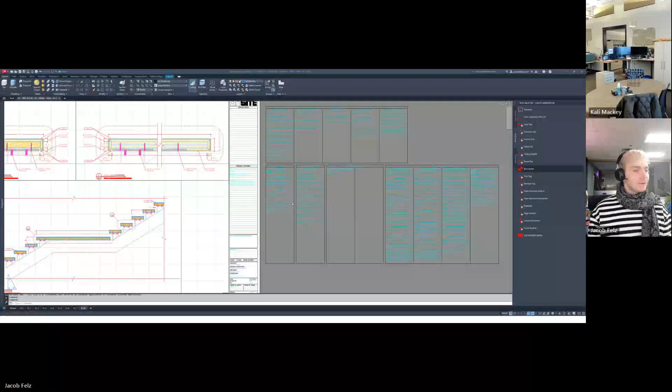No, I'm gonna just do two espressos. Reading Keaton's email. Sounds very lively over there this morning. Lively? Yeah, we got Trey over here talking up a storm. Per usual. That's just Trey. I could hear a bunch of voices. Wasn't sure what was going on, if y'all were having a party or something.

Let me check to see if my audio settings are going through. Okay, I'm gonna try to restart Teams. It's going through my webcam versus my actual headset, and when that happens usually you get a ton of background noise. I'm gonna try to restart Teams and my headset and see if I can fix that. Sorry about that, I'll be right back. All right. Jacob's got to restart Teams because it wasn't going through his headset. Got back just in time then. Mm-hmm.

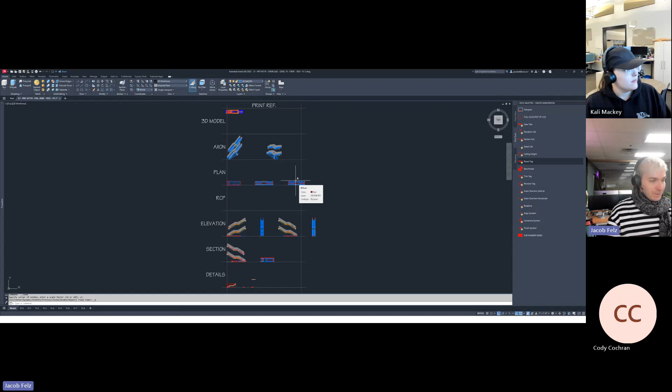So we did a little bit of this last time we were on this call. Last time we plotted all of our views, put them all in model space, and laid them out. Last night I was helping Greg get this wrapped up because he had to release it before the end of the week, so I tried to knock it out for him. Now we can review what I had done, and I've got a couple things I want to change that I thought about on my way home yesterday. So we'll look at what I completed since the last time we spoke.

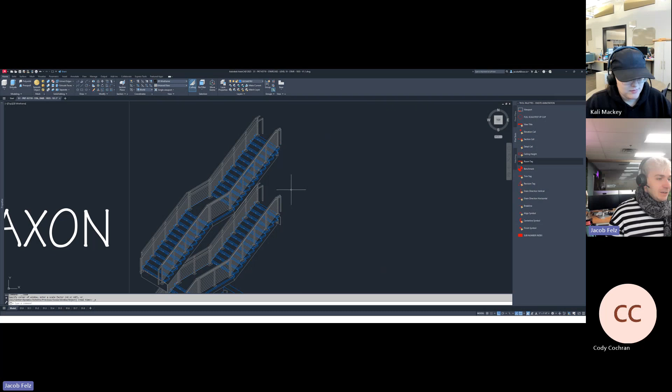Last time we took our flat shots, section planes, and section views off of our model and put them all in model space. We switched over to 2D wireframe, so we're dealing with 2D lines now. The model is still up here in the top corner, but that's okay. Since then I cleaned these up a little. I didn't change any geometry, but I put anything that was not by onsite on the existing layer, so you can see it in gray. That's a little extra finesse, not really required, but I like doing that.

I missed these lines here, so that's another correction real quick. I like to put anything we're not doing on the existing layers so it grays it out and makes it more clear what our intention is to provide. So I went ahead and did that yesterday. I actually see there's something else here too.

Right here. Looks like I may have forgotten to, I might have hid that plate by accident when we took our flat shot. There's like a steel plate that's supposed to live right here too. So I'm gonna put that back. I'm just copying it from the one below because it's the exact same plate, just copied up above.

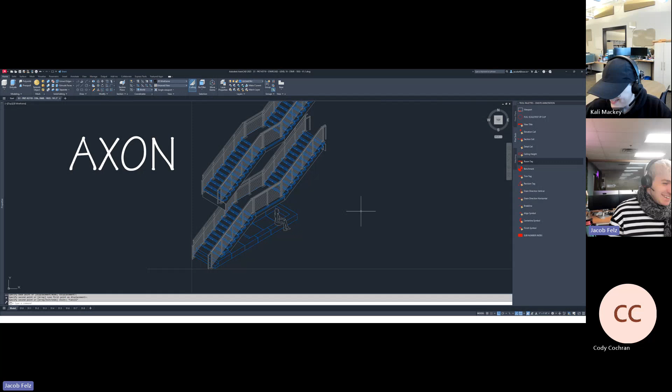So anyway, yeah, I grayed out anything that wasn't part of our scope, including Jean, newly named sitting lady. Carefully went through and made sure everything that was by us was on the geometry layer, so it's all in blue right there. There's a little bit of weird stuff here because this is the stringer going down, but then this blue here is where that stringer cuts through the platform below.

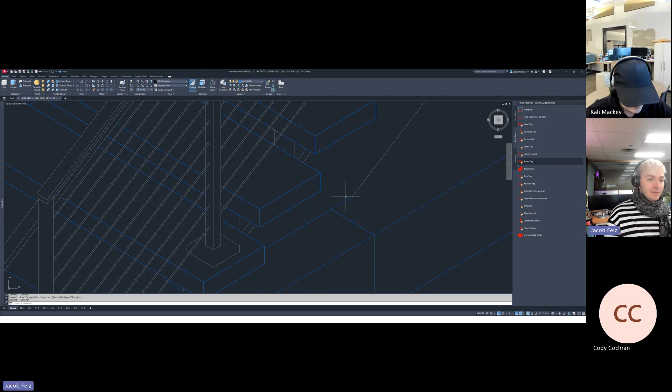And so I left those lines as blue because technically that's part of the top of our platform, even though the stringer is here. So I kind of did a combination of the two there just to kind of show like, hey, that's the stringer, that's the platform. See, this here, I also left it as blue too, for the same reason, it's kind of where that stringer intersects the platform. And so I was like, well, that's kind of the top of the platform where we're cutting out for that stringer. So I left it blue as well.

Pretty much the same notes over here too. I just kind of went through, grayed everything out that wasn't us, kept everything in blue or the geometry layer that was us. Except that. See, now I'm like scouring these for mistakes because I did this a little bit near the end of the day yesterday. So, no, that's part of the plate. Okay, I think we're good. Anyways, yeah, I just did that.

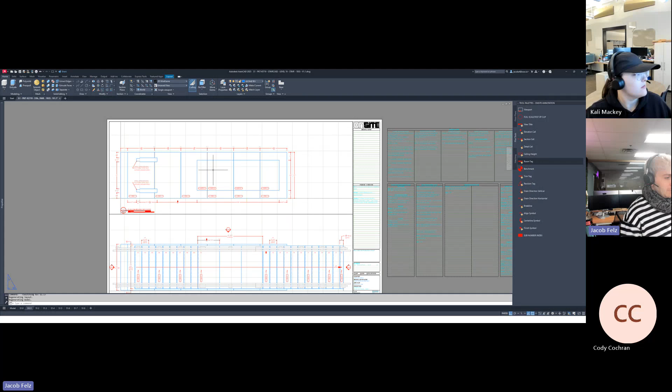Then I came down to my plan view. And in the plan view, I kind of went through, I'll go back to my paper space so you can see what I have here. I created 3 separate plan views for this drawing intentionally. One of them is just the planter itself without the staircase on it. That was just so we could show the planter and platform in detail here.

Actually, I'm going to put a little note on here since we're looking at this now, like a drafter's note, and it's going to read something like "staircase and stringers removed for clarity." That way we could actually see the extents of that platform. I'm going to underline that part too, and then get rid of that little leader.

But I'm just going to put that note here near the bottom of my view, somewhere close to where my view title is, just to give them a heads up. Hey, there would be stairs here, but I removed them intentionally so you could see the planter. So I'm adding that note here for that.

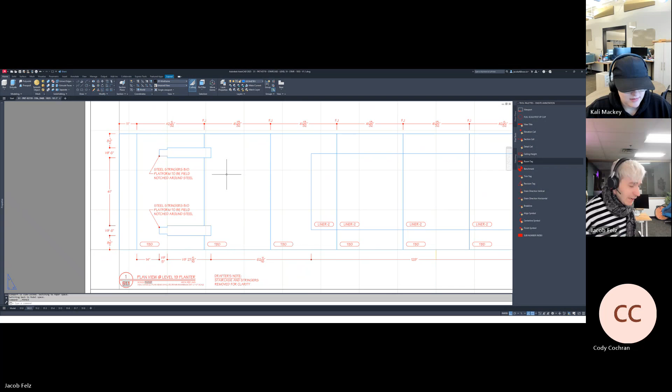I put a couple of notes on here too for these cutouts that are going around those stringers, because usually what we'll do is we'll do them in the field, because if we were to try to cut those in the shop, there's a very good chance it's not going to actually line up with what's going on in the field. Unless we get like a laser scan of this room or something, which I know we're probably not going to get.

So I just put a note on here saying steel stringers by others and platform to be field notched around the steel, just so that way our installers can see that and they can be like, okay, I know that I need to go out there with like a jigsaw and cut this out.

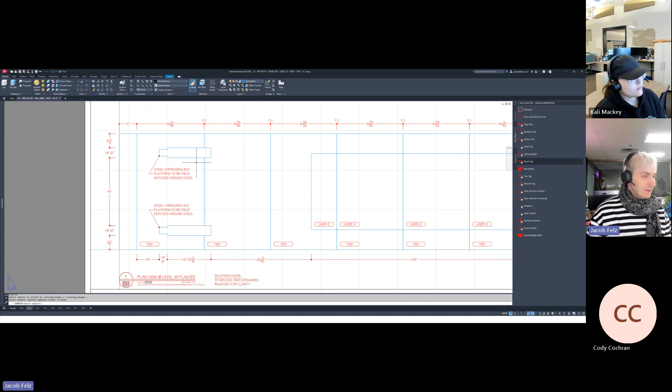I also did want to make sure that I take note of this too, is that where this cutout is, in order for that to slip over that stringer, we do need a field joint somewhere in that cutout, just so you can kind of push it together like a puzzle piece around the stringer. Because if we just put the cutout here in the middle, oops, it won't let me do it. All right, that's okay.

So if we put the cutout there, say, and the field joint was back here, there'd be no way for them to actually get that platform around that stringer without some kind of a field joint intersecting where the cutout is.

So it was kind of unintentional, but it happened in our favor here that the cutout does intersect a field joint. So I just wanted to bring that up, because if you don't have that, it would be really hard for them to figure out a way to get those two platforms to merge around the steel stringer that's already out there.

Let's see. The planter itself, I talked to Greg about this yesterday, and it is all undetermined as far as what the finish of the planter is going to be at this point. So yesterday we talked about that a little bit, and we made the planters. We try to make the field joints no more than 48 inches wide by 8 feet the other way, just in case it is some kind of material that is only restricted to a 4x8 sheet.

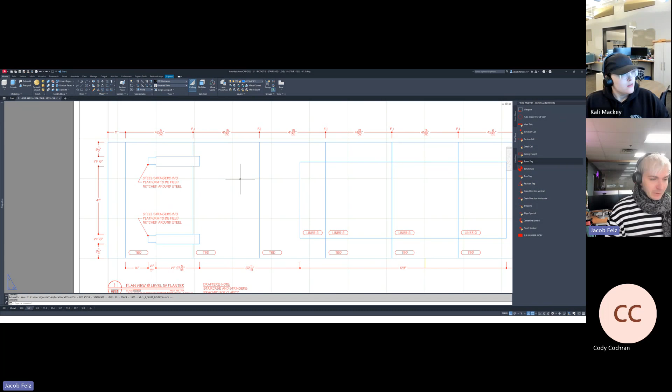So we did that a little prematurely, to make sure that if there is a smaller material they select for this, we're able to make it work. So those field joints are put there intentionally in that way. I also labeled all of the top of the planter as TBD with a material bubble too. I did that intentionally, and I put one on the stair step at the front of that planter too, because at this time we don't know what that's going to be.

But depending on how bloody the red lines are, Greg may or may not ask for our help with this. So I'm setting him up to be more successful later by putting these bubbles on here, even though they just say TBD. Maybe they don't mark it up that much, but they tell us what the material is, he can just go in there and paste that in Bluebeam right over top of where it says TBD and say PL1 for this. He's already got a material bubble placed there, so he just has to do some copy and paste work if that's the case.

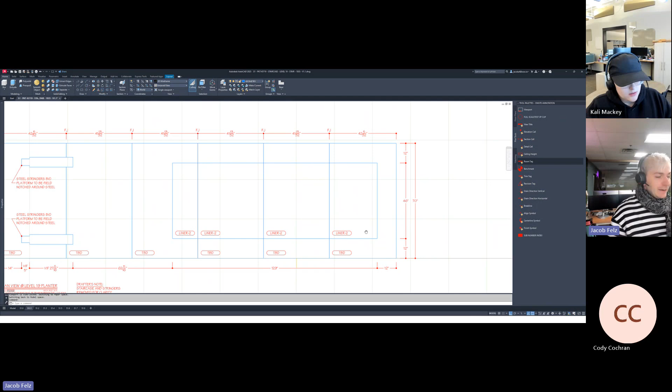I didn't put any grain directions on here because, again, not really sure what that's going to be. It may or may not be grain, so I just left that part alone for right now. We may find out what it is later, but for right now, no clue. And then inside of the planter, I labeled this with something called liner 2. Now, if you are in the material log, you're going to see at the very top on that standard job list, and it should also be in our template too, there are 2 types of liners up there.

So when you're dealing with a planter, you'll probably be using either liner 1 or liner 2. Liner 1 we tend to try to not use as much anymore. It is literally what it sounds like. It is a 5-gallon bucket of Flex Seal that they just paint on the inside of the planter, and it keeps some of the moisture out, but it's not as good as putting an actual liner in there. So we try not to use that as much anymore.

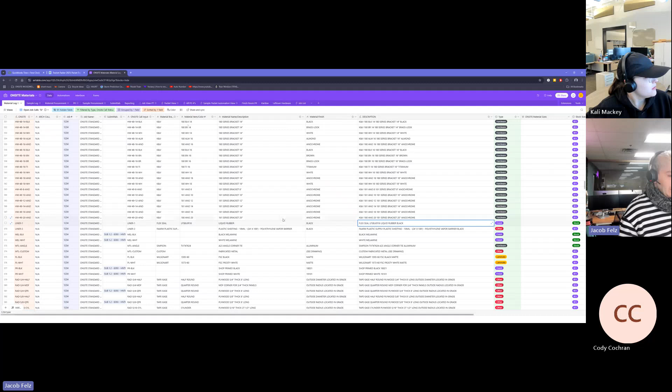For a while we were doing that because it was super simple and easy to do, and you didn't have to worry about coordinating with other trades, because our shop could just roll that on with the paint roller. But again, it's not as durable as some of the other things you can do. So the other thing we have, liner 2, which is what I put on here, is kind of our newest standard. It looks kind of like a roll of garbage bags, but it's really just a roll of black plastic. They put that in there, staple it to the inside of the planter, and it'll keep any type of water from getting into the wood or the framing below.

So that is what liner 2 is, and I went with that because I'd rather go the extra mile and make sure it's right, rather than use our old standard. If we wanted to switch back to that, I'm fine with it too. But liner 2 is definitely the better route to go for something like this. So yeah, I used that for the inside of the planter.

And then my dimensions around this guy here, I was being a little careful in selecting where I wanted to put those dimensions, because at first I was thinking about how do I really go about this. I guess what I could do too is, I didn't put an overall dimension up here, but I can definitely do that too.

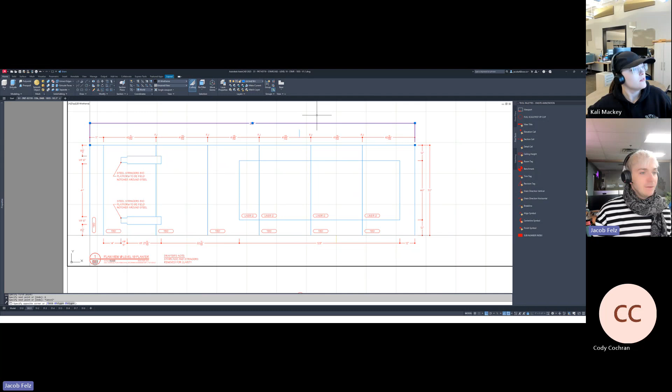Right about there. Uh-huh. Get over there. Come on, dude. What are you doing with your life?

All right. So I just put in an overall width for the entire planter. I already had my overall depth on this side over here. And then I kind of just broke it down in terms of my top line of dimensions. I went from the step at the front to my field joints, and I just kind of went down the line, labeling out where all my field joints were. And then I added this little text box up top that just says FJ, meaning that that is just a field joint.

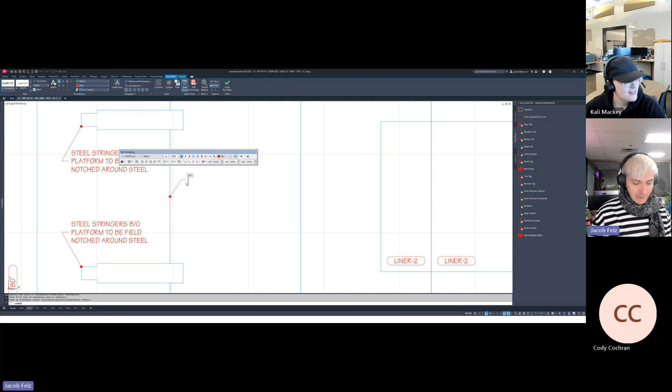We used to label them a little differently. Anytime there was a field joint, we would literally make a leader and point to it and say FJ for field joint on there. But that does produce more clutter on the drawing too. It's a lot easier to label it and not have as many lines and dots and things if you can just stack it right on top of the corner of your dimension string there. So we've been doing that a lot more recently. So I have those labeled up top.

Moving down this side over here, I have my overall, but then I was like, well, I need to label my planter too, so they know how to build that thing. So I went 12 inches in, 46 wide, 12 inches across the other side there. And then I continued that sort of method of dimensioning down here so I could show the other side of the planter drop down. So I went 12 outside to outside of planter, and then I just kind of took this and, oh, sorry, that was confusing. I was trying to figure out what the heck I did here.

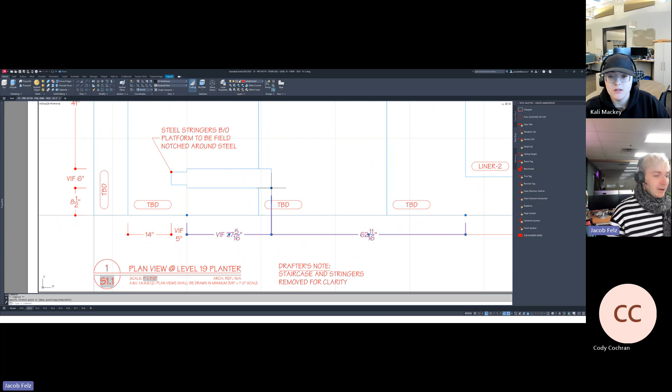That's supposed to be dimensioning this, but I brought this dimension back to here to be a little bit easier on the eyes, because then I don't have to have lines overlapping other parts of the drawing. Because there's already a lot going on here, so I kind of just brought those dimensions back to the edge of my drawing.

And then I went ahead and I just labeled the footprint of where that steel stringer is approximately. Definitely put VIFs on that, because we really need to make sure that that's right before we go about actually cutting anything there. So although these are exactly what you would expect to see based on that model they sent us, I just want to make sure that these are actually right before we stick somebody on it with a saw and they cut it wrong or something. So we're VIFing those.

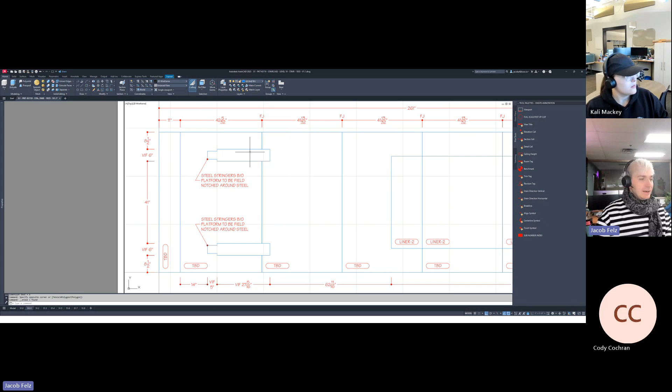And then the last side of our platform, what I have dimensioned is from corner of platform to top of my cutout, and then all the way through, just dimensioning the width of the cutouts. I am also probably going to put in a quick dimension here. Oh, I already did that. Never mind. I was thinking that I didn't have that labeled, but it looks like I must have that there. So we're okay. All right.

Planter, that's about it. Moving up to the next part of the plan view, this would be your 19th through 20th floor staircase. We did talk about this last time, but we put a label on each tread and each landing. That way we can label how many steps the shop is going to have to produce to do this. It's a lot easier for them to look at this and say, okay, I need 9 here for this, and then I need, well, I don't know if I should have restarted the numbering there, but anyway, they can pretty much look at this and be like, okay, I know I need like 20 treads for this drawing, so that's what I'm going to make.

And the landing, I have it labeled with a number 2. Really, that's just for my benefit to make sure that I didn't skip anything. But within the landing as well, I'd added some field joints in there too. Originally, it was drawn just like this, where there were no field joints in that landing, which when you're dealing with solid, you definitely need to have field joints for expansion and contraction, and also for just being able to get the material that wide.

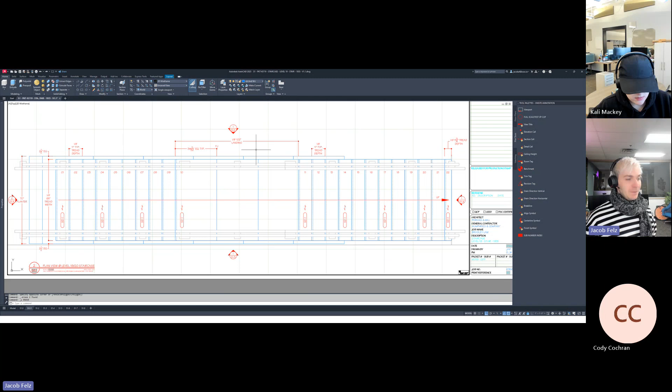So I just went with the standard approach where I tried not to exceed 48 inches wide for our panels or our solid here. At least to show them, hey, we're going to need field joints in this landing. It can't just be all one slab of solid, because where are you going to find a tree that's 102 inches wide?

Maybe the sequoias or something, I don't know, or the redwoods, but definitely not around here.

So I have field joints in there just so we can get that all situated. I also went ahead and put in some material calls last night. Greg came by and let me know that all the stairs are going to be SD1 for the project, which I think was a walnut color, solid walnut, flat cut. So that is what's going on there.

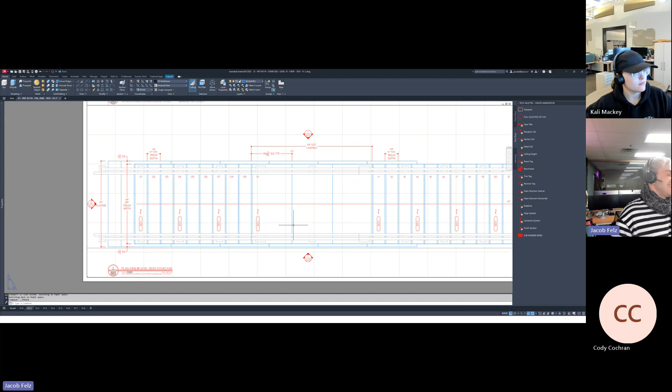I figured that was you. Anyways, so I went ahead and went every 3 treads and put an SD1 call. I could probably do even less than that and write TYP underneath of it, and that would be fine too, but I did that just so you could see this is continuing all the way up, all solid. My grain direction is all going from left to right when you're going up those stairs. It's all going long grain rather than short grain. If you went this way, it's probably not very standard to see that anyway. So anytime you're dealing with treads, usually it's going to go left to right. Let's see, there's some dimensions on there.

I think we talked about these a little bit last time too, but the treads, I went ahead and wrote 11-inch VIF TYP, and then labeled what I was calling out there. So it says tread depth on that. I also put one here, so people don't get confused or think that maybe the treads above the landing are different, because they all have to be the same. So I did put that there just to make sure it was clear that every tread from down below and up above is going to be 11 inches from front to back.

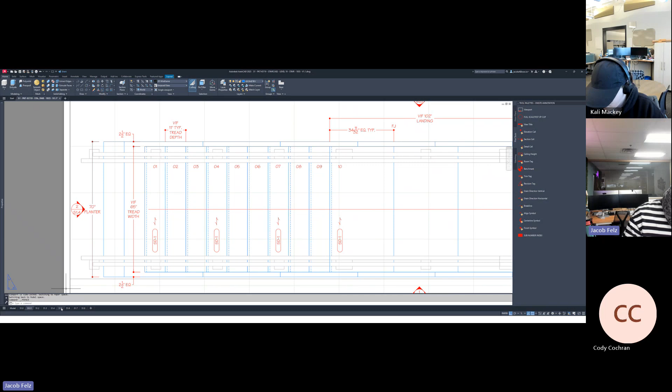The landing, I went ahead and put the overall dimension here, followed by a sub-dimension of just my EQ for where my field joints are going to go. And again, threw that little field joint callout up top so I could label that as what it is. On the treads, I added this in manually. It wasn't something that came in with the flatshot, but I went ahead and offset this line 1 inch this way, and that is to represent the fact that there is an overhang on these treads. So each tread is overhanging the tread below it by 1 inch. I showed that with a hidden line up top on our plan views here, so it's clear as day what's happening there, or at least hopefully clear as day.

I probably didn't need to label this here since it's up top over here, but I did it anyway just in case it's questioning what is this item that's down here below our stairs. So I labeled that from left to right, saying it's 70 inches, which is the same as what's up here. And then these are just showing that the stairs are equally spaced from left to right of the planter, where the planter sticks out past the treads.

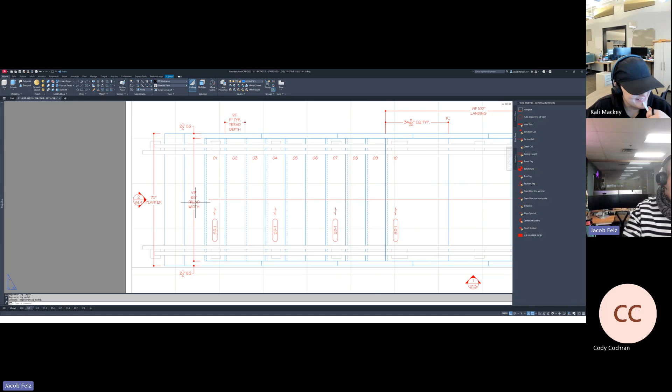I have one dimension here for my typical tread width thing, that each tread is going to be a total of 65 inches wide, but I did label that with a VIF because we are dealing with a different vendor's product, as we're dealing with the steel vendor. It does have to line up with the steel regardless anyway, but it should be 65 from one width to the next, to the next, to the next, all the way up. That shouldn't vary.

And the last thing over here is that little baby tread at the top. It might seem a little unusual, but that one is different. So I wanted to make sure that I gave them what I think the depth of that tread is going to be. That way, when the shop goes to make it, they don't have to make that full tread. They can just make that 5 3/4 tread there, and they shouldn't have any issues with that.

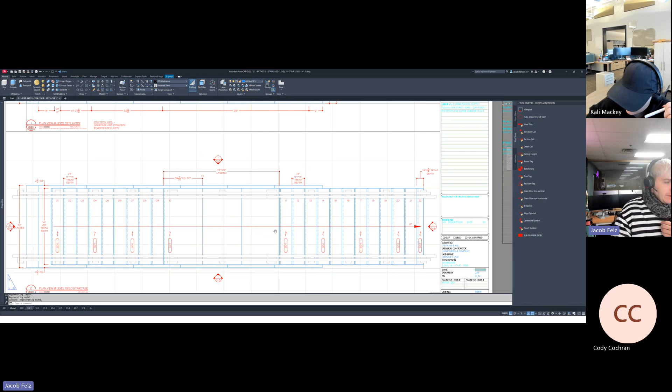And then of course you have your elevation calls just like you would normally have for any other drawing, so those are all placed on there. I'm probably going to add those to this view up top here too, because I did not do that.

Again, this was kind of, Cody saw me yesterday. I was a little frazzled. It was near the end of the day and people kept coming up to my desk, like, can you help me with this? And I'm like, dudes, it is like 4:30. I'll do my best to help you, but you're pulling me in 3 separate directions right now.

So anyways, yeah, I'm going to put these elevation calls up there too, so that way they're on both views, because we were using them for both this drawing and the one below. See, I need this one too. Get on over here. Oh yeah, and then that little arrow dude too.

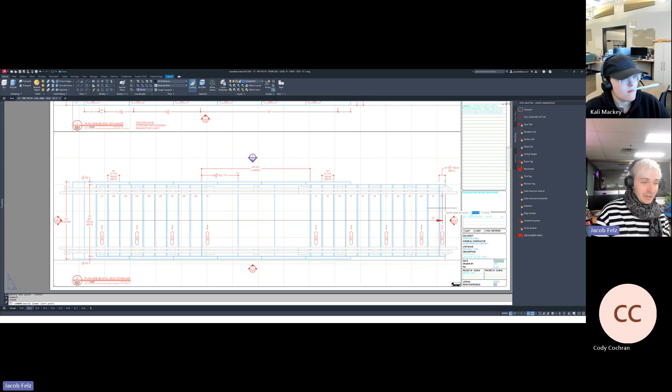So how I made that arrow, in case you guys are following along later and you want to recreate that: all I did was I used the leader command. You want to start with the side you want the arrow to be on. So if I wanted the arrow to be up here, I would just click my mouse somewhere on that view, drag it straight across to wherever I want it to stop. And instead of putting text on there, you can hit none.

And then what you can do from there is change out the dot for an arrow. It's pretty easy. You just click on that leader, you go into your properties on the sidebar, and you can go to this section here called lines and arrows. Where it says dot, there are several different other variants of leader, like tails and heads. So what I did here is I went closed filled arrow.

And then I changed my arrow size here. Well, that's huge, but by changing this input here, it allows you to change the size of that arrow. It looks like I probably just went with a 1/2 inch wide arrow. That's all I did to make that. And I just dropped a little text box on there saying up, meaning that that is the up side of the stairs. Let me delete that. All right.

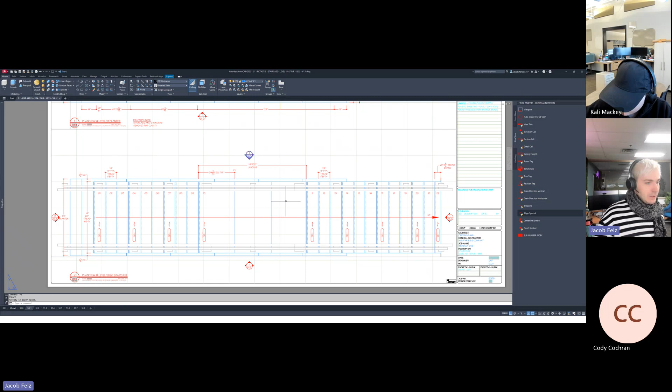So that's really about it for that plan view. And then if we look at the next one, it's going to be very, very similar anyway.

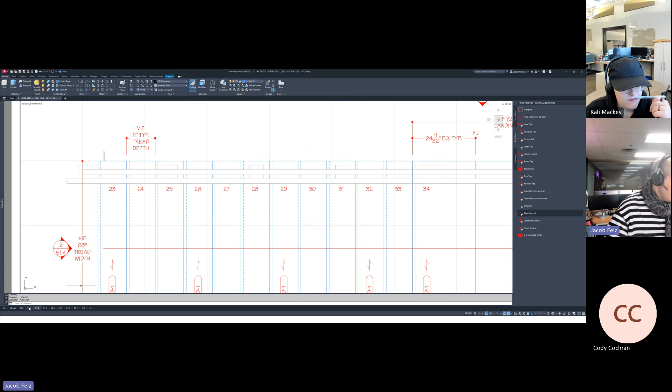Doesn't really matter too much, but I think yesterday I just decided I was going to go that route and just continue the numbering from the 19th through 20th floor staircase through the 20th through 21st floor staircase. All right, cool.

We can get into our elevation views next. So I will say a lot of times when you're dealing with stairs, you're probably not going to need elevation views for a lot of what you're doing here. I chose to include those on this drawing specifically because each of these treads has a finished end cap on the left and the right.

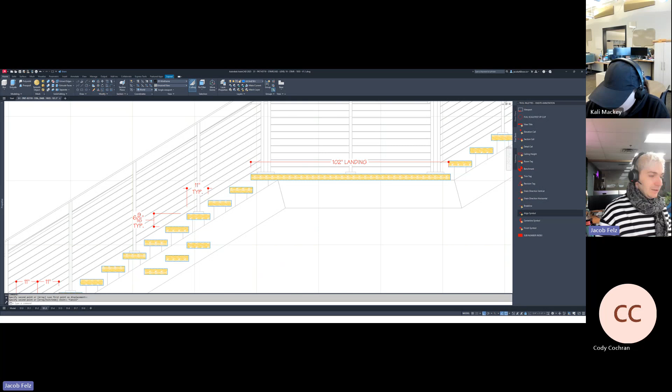Normally, what we're used to seeing is, I'll show you an example here. There's a copy of a few of these. Usually the treads live like in here, in between the stringers, just like that. That's pretty standard. This particular staircase was a little bit different, but I mean, it is custom millwork, so we do have to deal with kind of weird things here and there from time to time.

So because this was a little bit different and it had finished ends on the left and right of each tread, what I did was I went ahead and made those flat shots off our model so I could provide an elevation view of all four sides of the staircase, in case it does help anybody later on with visualizing how this thing comes together.

I also put hatching in here, which we don't usually do for elevation views, but I put this hatching in here to show the grain going from side to side on the side of the steps. You could also just put a grain direction arrow on there too, and that would be just as fine. But I wanted to try to make this look a little spicier than what it was looking like, so I cleaned it up a little bit and added that in to make it look nicer.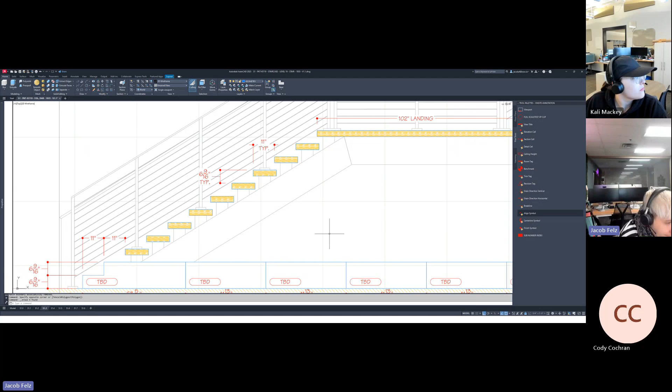You can notice down below, all these planter panels are labeled as TBD. I didn't put field joints in here, so I could do that too.

Let me do that real quick. I'm just going to drop in a text box here for that, delete the leader, and then in my properties, a lot of times what I do with these is set the justify from middle left to middle center. That way the grip point on the text will be centered on it instead of off to the left or right, so you can use it to center your text right over top of your dimensions like that. So I'm going to add those in.

I'm going to have to do that on the other side too, I'm sure. All right, so just like that. I don't have the field joints in this landing either or this one, so I'm going to add those in too.

To do that, it might be better to use my model space. What I can do is copy these lines off of my lower landing, using the copy command with the base point of the front of that landing. If I go back to my elevation view, I'll find the larger one, there it is. I'll just paste it right there using the edge of my landing, just like that. That should make sure my field joints are in the same place as in my top-down view, because these were something I added in after we had made the model. They didn't appear in our flat shot.

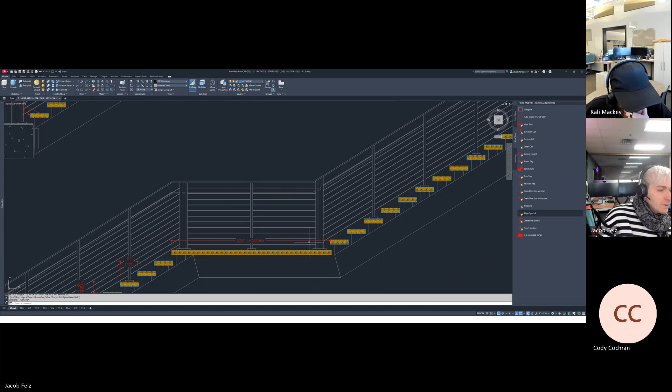So I'm going to do the same thing here and then work my way to the other elevation, just mirror those over. Copy, using the front of my tread or my landing. And I'm going to go back down to here and paste it at the front of that landing there, and then trim these lines back so that they're touching the edges of that landing, just like so. Okay, now.

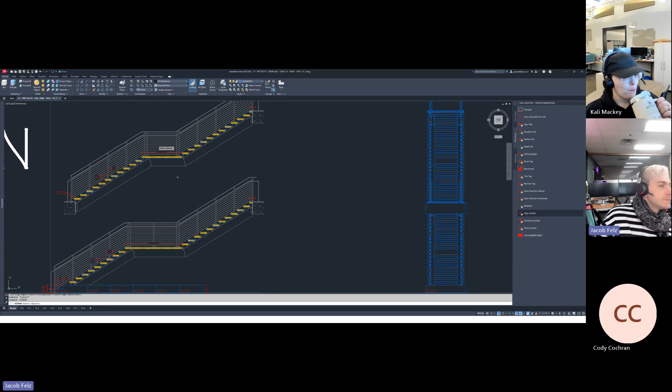From there, I want to actually copy those into this section view here. I also want to copy those over to this elevation over here too, so let's do the mirror trick to get these over to the other elevation.

I'm going to highlight these field joints, and before I set my mirror line, I'm going to hold down Shift and right click and go mid between 2 points. I'm going to use this sort of magic trick to get this to work just right, so I'll go mid between 2 points.

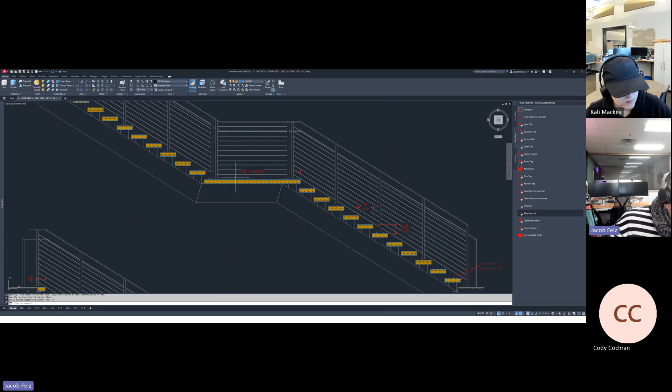If I select the front edge of my bottom landing, and then the front edge of the landing on this side, because my views are all lined up, that magically makes it so now if I hit mirror and don't erase the source object, this is going to allow me to line these field joints up just like they are on this view, but flipped the other way.

Now, I guess I probably didn't need to do that anyway because they're all equally spaced. So in hindsight, maybe that was kind of dumb. I could have just copied them, but I didn't think about that until just now.

All right, I'm copying these. I'm going to paste them down to the landings on the section view here.

All right, and then I'm just going to clean these up a tiny bit. Those field joints, I'm going to show them just going through that top layer of plywood and solid, just like that. Do the same thing up here, because you don't want it to cut through the bottom panel here. That would just be silly to have this little 1-inch panel at the edge, so we're not going to worry about that.

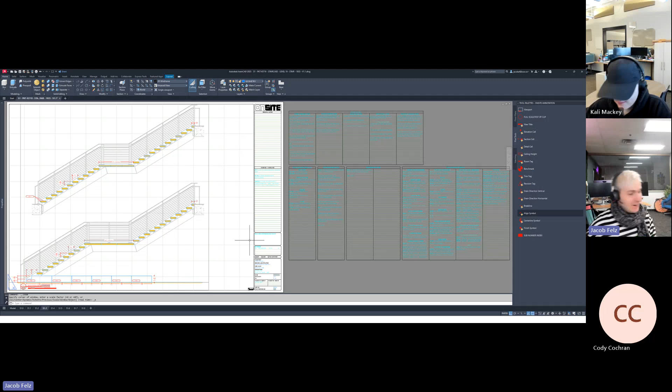Okay, cool. Let me go back to what we were doing. It's kind of funny because I'm like checking my work as we're going through this. All right. The drawing turned out beautiful, but beautiful isn't everything. Sometimes you got to have accuracy in there too. So, all right. So we got those joints in there, no big deal.

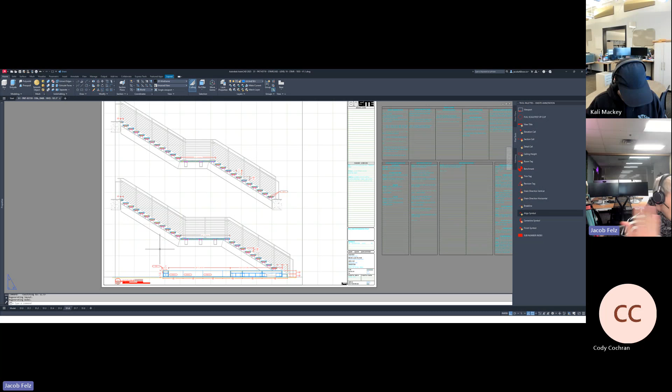I want to add in a couple of section calls here too on these elevation views, which was one of the things I thought about last night on my commute home, was that I did not put in a section view for this view here, and I didn't put one in for this view here, which this one is a horizontal cut through of the planter. And this one here is just a vertical section through the entirety of the staircase from left to right.

So if I go back to our elevation views right here, what I'm going to do is I'm going to take the section call block. I'm going to drop one in here. I'm going to rotate this around if it lets me do it. Oh, I don't rotate it again. I kind of want this to be on this side because there's more room over here. If I put that bubble over here, that thing's going to be cut off.

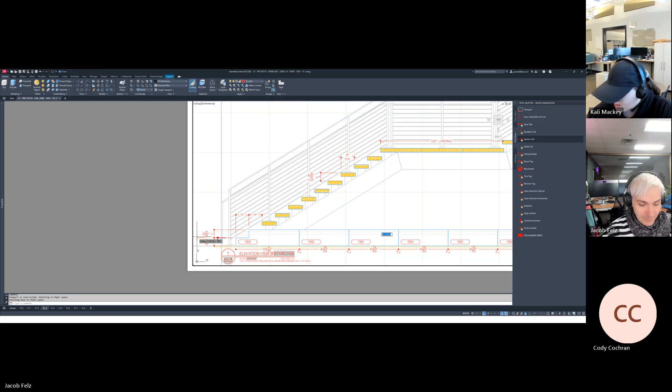I wish I had a funny pun for that. I can't think of one right now. Anyways, we'll put this over here. Ah, jackwagon. Making commentary about AutoCAD behind its back in front of its face.

All right, I got to change this label here from S1.3 and it's going to read S1.7 because that is the page that has this section view here. So going back to that elevation view one more time, I put that in there. I have an elevation of the front and the back of the staircase, which we kind of looked at the other day a little bit. This is where I'm going to call out that vertical section through the stairs.

I might actually add that hatching in for the treads here too to be consistent, because right now it looks pretty plain Jane. And I don't think I even really put any dimensions on here, so we can also do that too. I have material calls, but I don't really have any dimensions on it. So we'll add that stuff in too. Before we even do that though, let's add that section call in. Well, I guess we got 2 section calls to add. We got our horizontal one at the base, and we have our vertical one through the middle of the stairs.

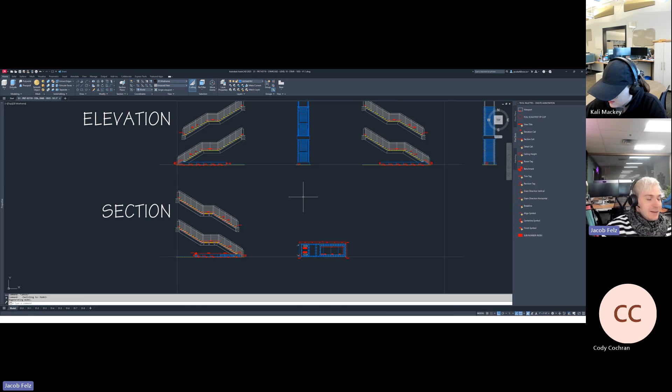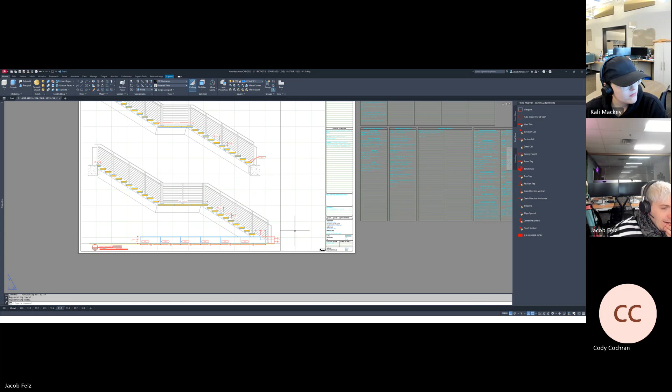Ooh. All right, sometimes I like to do this in paper space, and other times I think it helps to do this type of stuff in your model space. In this case, I'm kind of going back to model because all my views are on separate drawing pages. So it allows me to use the copy command here and move it from this view to this view. But let's see if I can make this fit. I have to go back to my paper space and just see if there's any issues with that. Yeah, look at that. I knew it. All right, I'm moving that over. All right, so I got that corrected.

Vertical sections. So let's go over to our front and back of our staircase. Let's see if we can add those in. It's going to be kind of tight. There's really not a lot of room to work with here. So I might have to break some rules of my own. Usually what I'll tell you guys is you want to make sure that the flag and the arrow are outside of your view. But in order for me to do that, it would have to be like up here in the gray, and that's not realistic.

So what I'm going to do is get it as close to the top as I can without it crossing over that line. And then I'm going to take this line here, and it's going to have to overlap our view too, unfortunately. Makes me cringe at the thought of it, but it is what it is, because this is a very tall staircase. So let's see, and that is view 1 on S1.4. So we need to change that out. That's 1.4. Very important. I'm going to go through here and copy that over from this to this.

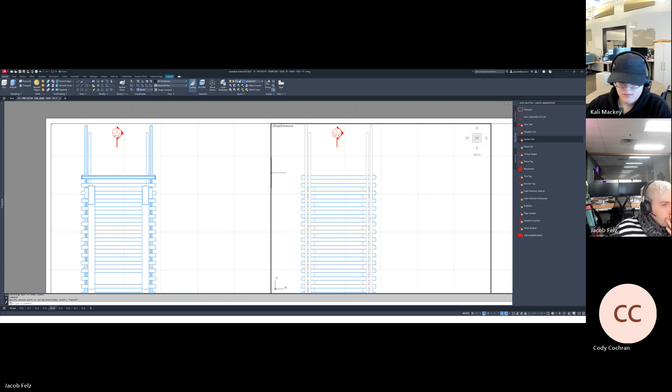All right. And technically, really that should be flipped anyway, because you're facing the other way when you're cutting through it. I'm going to come back and do the hatching on this after we're done with everything else. So I'm going to say a note to self, hatch page S1.4.

And keep going through here and see if there's anything else we can do. This is kind of hard to really dimension anything on this view because of all of the things happening here. There's a lot and not a lot of space to work. What I could do is I could potentially put in some height dimensions like right here, which would give this view at least a little bit of substance, because right now there's just nothing to it.

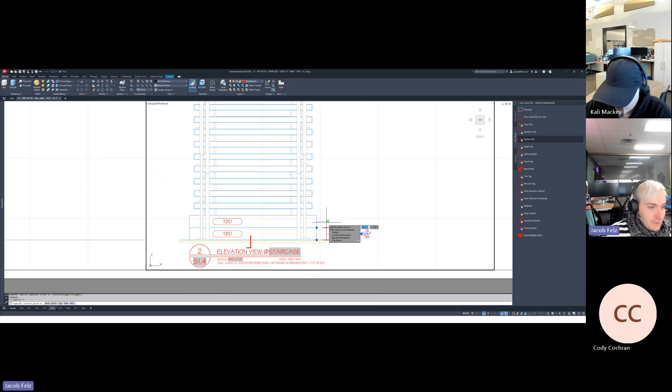It's really just there to show that, hey, I got a front view and a back view of my stairs. So these are going to be the 2 planter steps. What I can do as well is copy this up. Well, let's copy it to here. So it's saying from top of tread to top of tread is also going to be 6 9/16. I'm going to write TYP after that too, because those should be the same from one step to the next.

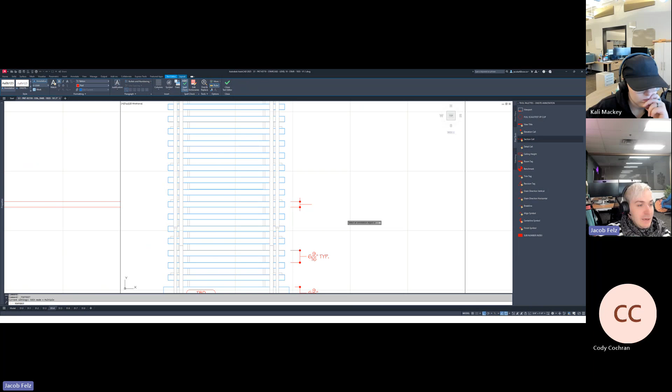I guess I could also put in a height dimension on the actual tread itself too, like one of these. Although that is shown in the section too, so it really doesn't need to be here, but I'm going to put it in there because I just feel like this view is lacking in a lot. Like, I almost don't feel like it's really doing much of anything just being here on the drawing. So I'm going to roll with that.

Then we can copy these over from this view to this view. The only exception to it is that this has to increase here, so that way it's showing the total height of the planter. And really there's not much else that I can really show dimensionally here. I mean, I could do a width, but there's really no room to put that in. So the only option I would have to do that is if I put it on top of my treads, which I'm trying not to do.

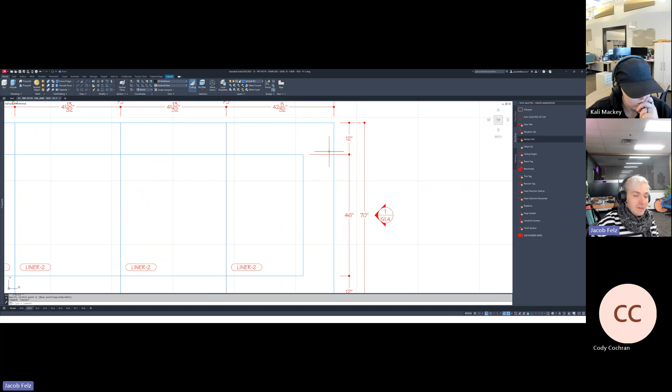It's best if you can avoid putting dimensions or anything like that on top of your drawing, because it will start to clutter it up, make it hard to see what it is that you're looking at, which is a lot of the reason why I was talking about on our plan views earlier about pulling the dimensions back from the edge of my planter, like these guys, for example. I was pulling those back because I didn't want that line to be misinterpreted as a field joint, because when you go to plot it, of course, on paper, it's black and white.

So I pull that up. It literally could be, somebody could easily make that mistake because there's only that little tiny gap there, which, if you're not looking closely, is a potential issue that could happen. So I'm going to move that back just to be on the safe side. I'll leave that view alone for now. This one, see if there's anything to add to it or if we're okay here.

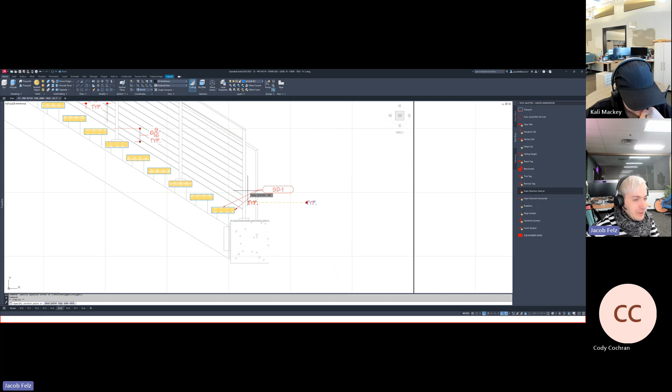All right, I have a material call here. Suppose I could probably write TYP after that too. That way I don't have to label every single tread saying, hey, these are all SD1. I can just be like, okay, here you go, TYP SD1 for all of these guys. So I'll go ahead and label that. I think I have to do that on the other flip side as well. Yeah, I do. So I'm going to copy this over from this view over to the one on S1.3.

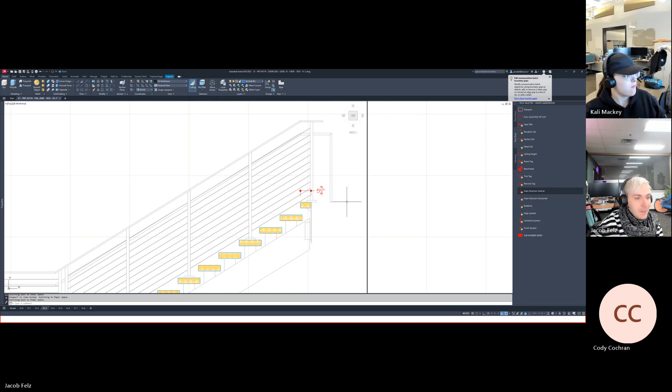Okay. And the last thing that I did add to these views last night, right before I plotted this, was, before, when we did our flat shots, our view kind of looked like this. So the railing just stopped out in the open. And I was debating whether or not I want to do a floor hatch like this up there, or if I wanted to show more like what their model showed.

And so what I did was I went into that CAD model previewer and I pulled some measurements on the concrete deck, which is just the structural concrete between the floors. And then they have a layer of tongue and groove plank flooring on top of that. So I pulled some measurements off their model and I just sketched this in 2D on my elevation view and copied it throughout the rest of my elevation views to show there's a concrete deck that butts into the steel, and then there's a solid wood flooring that goes up there.

But again, I grayed it out, so that way it's not something that can be misinterpreted as something that Onsite is providing there. And so I did that across all of these, wherever the landing or the staircase met the floor above, so that way it had that sort of look to it and you could see what's happening there.

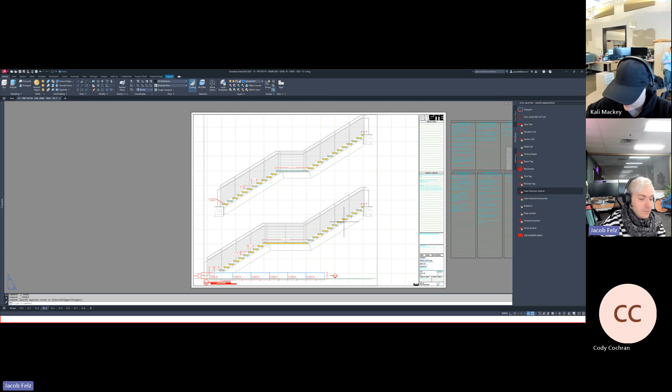That's probably about the last thing that I wanted to talk about with these elevation views. So really, most of the work that we did in our model saved our butts here, where we didn't have to go through and do a bunch of extra drawing in all of these and all of this, because that can take forever to do by hand in 2D. Anyways, let's keep on moving.

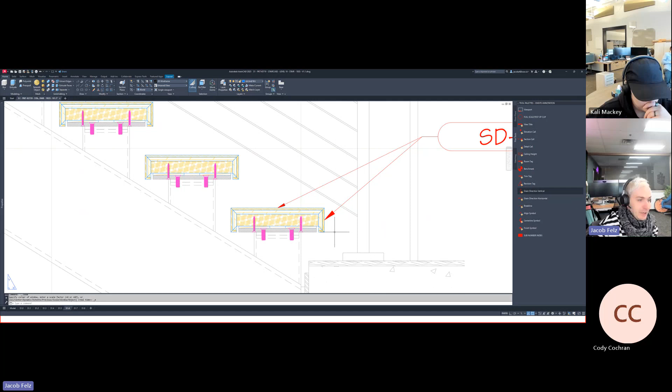That's the same notes for that view. This view, we just added those field joints in a minute ago. And same with this guy. I did something weird yesterday too. So yesterday morning, I received some information from Greg that the stairs were changing slightly. We were briefly discussing that yesterday, but they went from having a 1/8 by 1/8 caulk here at the metal plate to having a 1/4 inch full depth reveal that goes straight up to the LSL layer that's here.

And so, because I didn't feel like changing every single tread in the 2D drawing, I went in here, fixed one of them, turned it into a block, and deleted all the other treads that were already there. And then I just used my copy command, picked a base point on this that matched up with the next one, and went boom, boom, boom, all the way up the staircase. So I didn't have to fix every single tread, because that would have taken forever.

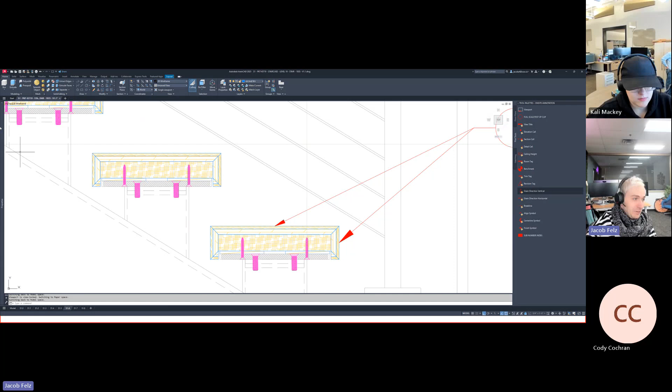So fortunately now, because they are blocked, if they decided to change it for any reason, you can go into that block editor and say, okay, maybe they did want to go back to a 1/8 inch reveal. Well, boom, I can go 1.125, 0.125, and my hatch didn't stretch with it, but because it's just an example, I'm not going to bother fixing that. But if I fix it in one block, it updates every single tread now. So that saves us a lot of time there too. So I'm going to undo that and go back to where we were before. All right, cool.

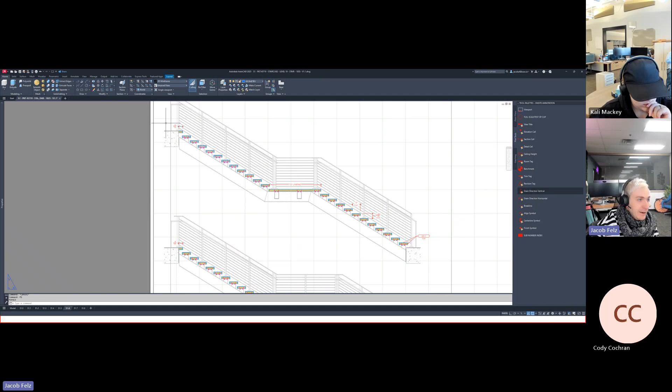This probably needs a TYP on it too, because we're only calling out one tread, and if we want to do this the right way, we want to make sure we're doing that with one of those TYP notes on there. Okay. All right. So a lot of these same dimensions apply to the elevation view. Dimensionally, I followed the same method of approach where I did one TYP for the depth, one TYP for the height, and then measured my landing and my baby tread up top. I did that same thing in the elevation view.

Section view, I had to do a lot of changing out the hatches on here, which is fine. I went through and updated all these so that they show plywood hatching for the locator plate, base plate, top plate, and then the vertical plates on the ladder frame. I did show this as MDF on here. Not even sure if that's what it's really going to be because, again, we don't really know what that material is at this point in time. So I labeled that all with MDF hatching for right now, just temporarily.

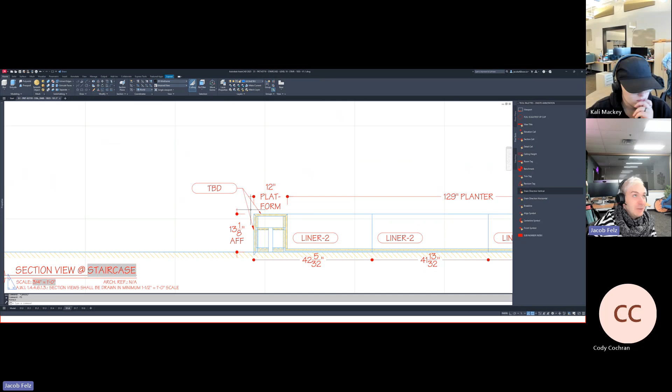And because I did that, I also put 1 inch of scribe to the floor all around the entirety of the base of our planter and platform thing. This says TBD for the outside panels. And then the inside, I've labeled everything with liner 2, so that way we can have that plastic liner that gets stapled in there. So we have all that covered. I didn't change anything else on here, but I did throw a fair amount of dimensions on it to show as much as I could and make it easier to see what's happening here.

But yeah, not much else is different about that. So keep on moving to our 2 last pages here. This is our horizontal section through our planter. Again, we looked at this just a minute ago. We put a TBD on the outside perimeter of those panels. I try to put them on every corner.

I went to put one on this corner though, and it was interfering way too much with my dimensions. So I just decided I was gonna not put one here and just put it on the other 3 corners, just to make it look nicer. I put these same notes on here about the stringers and how they're by others, and the platform has to be notched around them. That way that is in multiple places on the drawing in case it gets missed on

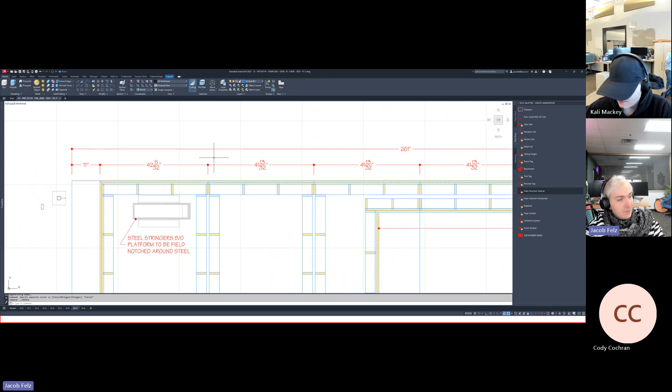the first go around. Put the inside dimensions of the planter here, outside dimensions of my platform out here. These are my field joints. So again, we'll label those here. Field joints. Oops. Yeah. Again, this is me checking my own work because I didn't have time to really do it last night. So I'm doing it now once I've got that fresh set of eyes on it, like we talked about a lot of times.

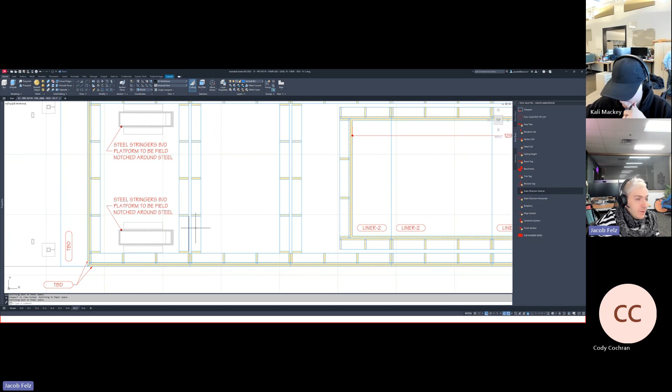could. But they have the liberty to change it if anything does make more sense for them to build it a different way. I just kind of went with my gut feeling on that by doing the rabbited sort of nailers on the front, rabbited sidewall up and down, and the ladder frame across the top. Anyways, and then of course, we have this last page here.

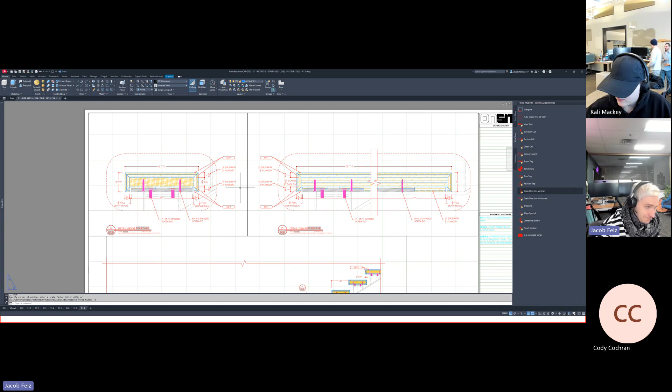This last page is just showing those same details that are in the stair CAD file that we've been using a little bit to work with and modeling our staircase. I've updated them a little bit since the last time we looked at them. One, I put in those 1/4 inch full depth reveals at the front and back of the underside of our treads. I did the same thing here on our landing as well. So those are there too.

I've also added in additional notes about the hardware, although a lot of this is by others. I wanted to make sure it was called out, so I put in 1/2 inch by 13 flathead machine screw by others there. That's what they had on their drawing from the steel vendor. So I was like, I'm just going to place that note on there too, so it's understood as to what's happening there. And then this one here actually does interact with our woodworking, and that's how the treads are being attached to the steel plates.

So they have machined out like countersunk screw heads for us to be able to use some screws in there to attach. And they said that the type of screw that they're accounting for is a number 14 2-inch flathead wood screw. We do have blocks for those in the CAD file, and I have been working on getting them into the tool palettes. But if we didn't have one, for example, like this is a machine screw, so we don't usually keep those in our blocks because they're not like woodworking screws.

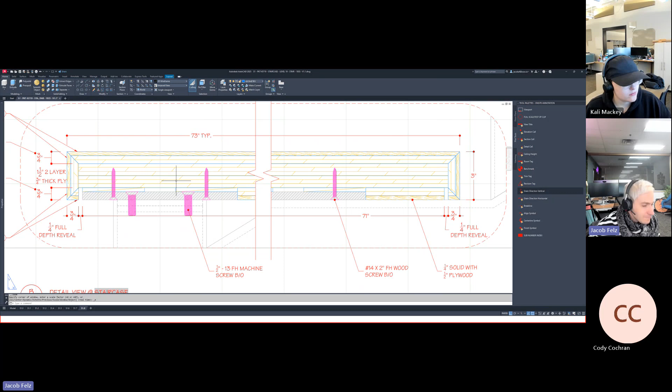I had to go on McMaster-Carr's website and find one like that. It's pretty easy to do, but the beauty of it is the McMaster-Carr website is actually very, very helpful when it comes to finding little bits of hardware that you normally wouldn't need. So if I'm on their website, again, really good website to bookmark if you haven't already. I'm looking for this machine screw just for example here. It's calling it out as a 1/2 inch by 13 flathead machine screw.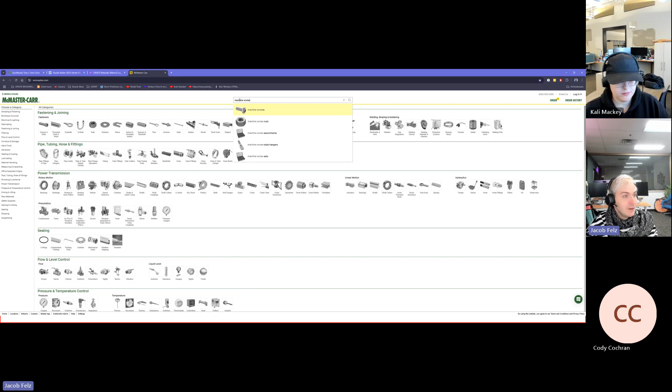So I can start by typing in machine screw up here. It'll come up with all of the different machine screws that they have on their website. And you can scroll through the different options. So I'm looking for something that is a 1/2 inch thread by 13 threads. So 1/2 inch by 13. So if I scroll down, eventually I'll see one, hopefully, that matches that. So I can go to there, and then it narrows down their inventory list to a set of machine screws that have that thread count on them.

And then you can go a step further, and we know that we're dealing with a flathead. So we can go down here and select flat. So then it narrows it down even further. And then the last thing I did to narrow it down was I wanted to see how long of a machine screw that they were building this with. And I think I just scaled it off of their model because it didn't actually say in their notes.

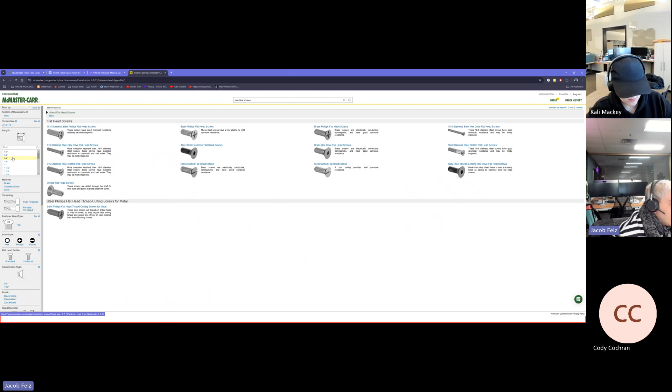But let me just check it here. It's a 3/4 inch tall screw. So we'll go over to here. There should be an option for your screw length at some point right there. So you can click on 3/4 of an inch, and it's going to give you all the options they have available for a machine screw that's a flathead, 1/2 inch by 13 thread count, and 3/4 of an inch tall.

And so I think I just went with this top one because for us it's just to show that there's going to be a machine screw there, but we're not even providing it. So I don't necessarily care too much about what spec it is because it's not part of our scope. But if we were providing it, I'd like to actually try to show as much of the information as I can.

But if you go on McMaster-Carr's website, you narrow down your search options and you go into this submenu here. If you're looking for anything like this, you want to click on this serial number here. That's going to take you to the product page. Well, it will take you there if you click product details.

And from there, they actually have CAD files for almost everything on their website. I would say almost because I'm not sure that they have stuff for everything, but they even have CADs for little machine screws like this. So it's really helpful if you need to bring one into your drawing. You can either tell it, hey, I want to look at a 2D DWG file of that, and you can just download it, open it up in CAD, and import it into your drawing.

If you needed it for 3D purposes, you would want to use either the 3D step file or 3D step no threads. Got stairs on my brain. So 3D step or 3D step no threads. The reason there's a no threads one is because the ones with threads, if you have to put a bunch of them in your CAD file, it will slow your computer down. If you're only doing 1 or 2, it's no big deal.

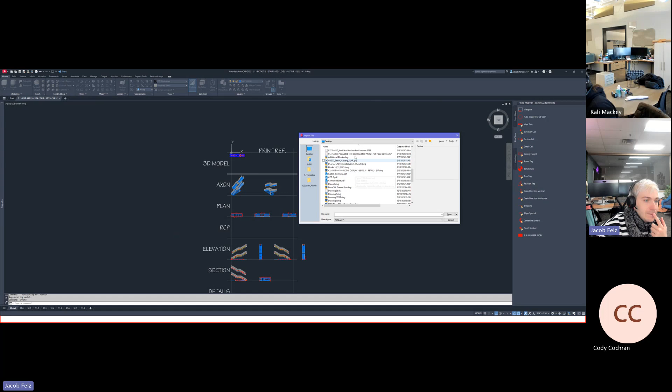Okay, and then this little import file menu should show up. I saved that 3D step file to my desktop. So what I need to do is go to my desktop and then find that file. It should be, it started with a jumbled mess. It was this guy, I think. I'm bringing that one in. So if I click on that, hit open, it's going to say your import job is processing in the background. You can just hit close on that.

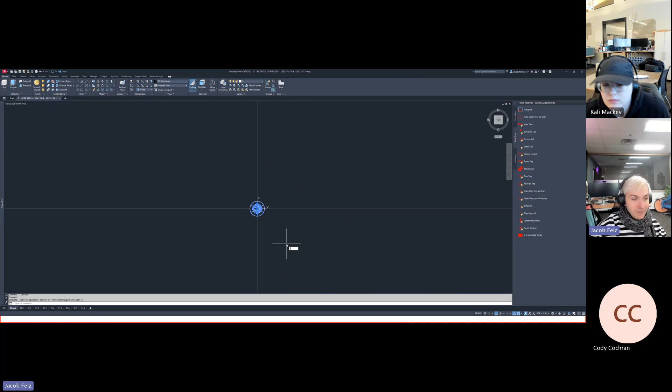You can see this little flashing icon down here saying import job in progress. Once it's done, this little bubble will show up there, and you can click on this link here. And that's going to actually bring it into your CAD file. So as soon as you click that link, it shows up at 0, 0. So it shows up right here in our case. And then if I rotate my view, you can literally see I have a 3D screw in here now.

So pretty cool stuff. If you ever have to deal with a lot of mechanical drawings or metal drawings, it's really helpful to have that resource available to you. Because sometimes there's going to be screws or bolts or things that we don't have in our CAD system that you may actually need. So McMaster-Carr is definitely a very, very good resource for that.

There's other websites too, like Grainger is another good one, but they don't have as many CAD files for their products. So I pretty much religiously use McMaster-Carr for a lot of things, for mechanical parts like screws and hanger attachments or threaded rods and different things like that, because you can get all that stuff right off their website for free.

All right. Anyways, go back to 2D wireframe because I'm getting the lag again. All right. We were on this page. We are just taking a look at it. So I put those fasteners in there so you can kind of see what they looked like, and labeled them to tell the viewer what those fasteners are. And then I labeled out some other stuff too, like 3/4 here, and put a little side note saying, hey, this 3/4 is a 1/4 inch of solid with a 1/2 inch of plywood glued to it.

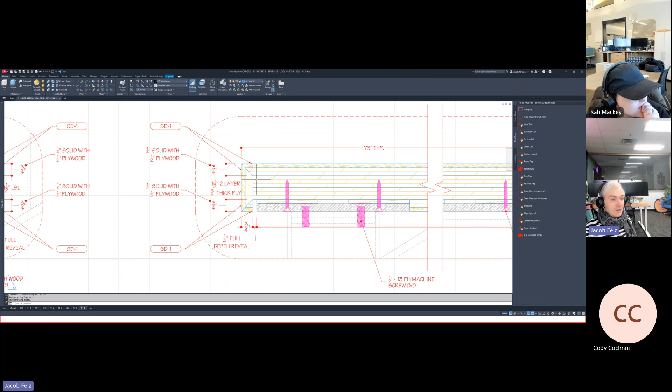Probably not even needed to put that note, but I wanted to make it clear as to what I was talking about there. On this one I put extra info saying it's 2 layers of 3/4 thick plywood, not some kind of weird monstrous 1.5 inch thick piece of plywood.

That did change, so you guys are aware. In the original sketch for the stairs we had little cross plates for the metal, and we were going to ask them to provide a sheet of metal on top. Since the project manager and contractor spoke about it, they decided to use 2 layers of 3/4 plywood instead, which they believe will be enough to beef it up so it doesn't warp or sag as people walk on it.

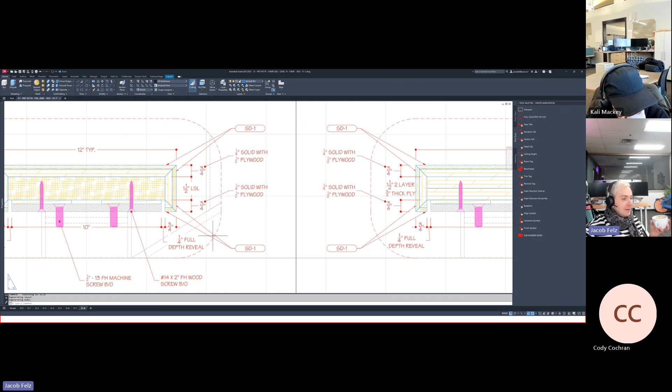That's why this looks a little different from what you're seeing on this tread. This tread has the LSL on top rather than the plywood layers, but really it's not that much different, just a different type of material. I labeled that differently here too - I actually said LSL for that, and on this side I wrote 2 layers of 3/4 thick ply. Same notes about fasteners, reveals, and all the needed dimensions for the shop to build this tread.

This view here is kind of a blow up of part of the drawing, which I want to call out somewhere. I'll probably go back to my section view and point this out to show how to get to this view from that section view, so there's a map going back to it. Otherwise, I think that's the only other thing I want to change - making sure I have a blow up callout going to this page for this enlarged section view.

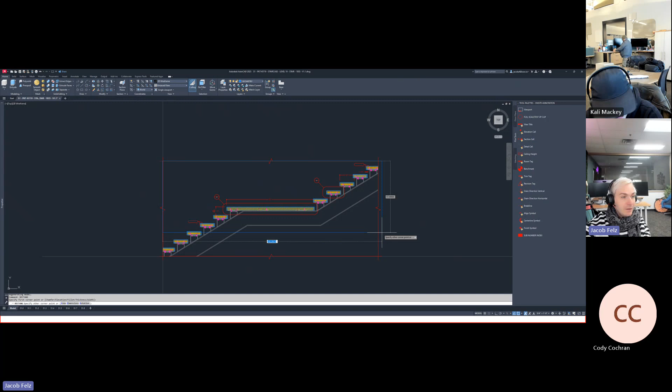All right, so to do that, I think I'm going to draw a rectangle around the break lines like this. It's on the geometry layer, so not really the right layer, but that's okay. It is centered over the landing. I'm going to take that landing - find my landing, it was this one here that we used - and put that there.

Then I'm going to fillet the corners of my box here. I just used a 12-inch radius, kind of eyeballed it - you could pick a different radius, it doesn't need to be anything specific. I'm going to fillet those, put them on the dimension layer, and then make it a hidden line.

I'm going to call this out similar to how we'd call out a detail call. I'll put one of those bubbles on it with an arrow pointing to it saying see view 1 on S1.8 for this guy. I'll just use one of these - S1.8.

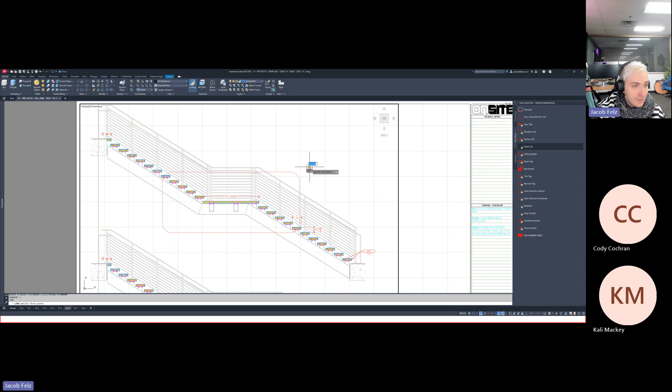I'm just going to connect the center of that to the center of my drawing here with a line, and then trim these back, just like that, kind of. There we go, that's better. Then I can use match properties to fix that up there.

All right, that's about it. So questions or anything for these stairs at all? Anything you guys can think of?

Not off the top of my head. I think as I go through the earlier videos I'll probably - I might come up with some, I might not, depending on what's been answered in this one.

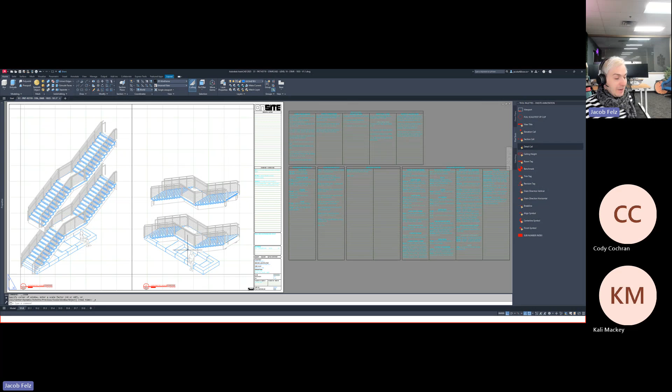Sure. And sorry, I kind of jumped ahead a little bit too because I had to get that done for Greg yesterday. So I took the liberty of going through yesterday afternoon and adding in the hatches and notes and things. I wanted to cover that with you guys so I wasn't just presenting the finished drawing we're matching - I wanted to walk you through it to see if there's any questions, and make sure we covered all the additional notes, section calls, material calls, all that fun stuff.

But if there's no other questions yet, that's fine. I'll probably replot this - I'm going to go back and add the hatching to this view and this view here, but I'll replot it once I'm done with that and save it to the prelim plots folder.

If you guys want, for right now, I don't really have much else to send your way at this time. So if you want to keep working through this, that would be perfectly fine. How far are you guys through this stuff so far? I know, Cody, you got all the treads and the landing for the first set of stairs pretty much in your model, right? Yeah, I got the

I can speak. The little one. I got the little one in this morning. Okay. And then I was trying to start on the... I don't know. My mind just went blank. I'm sorry. Oh, you're good. I know you're not feeling the greatest today too, so hopefully you start feeling better soon. Hopefully I will.

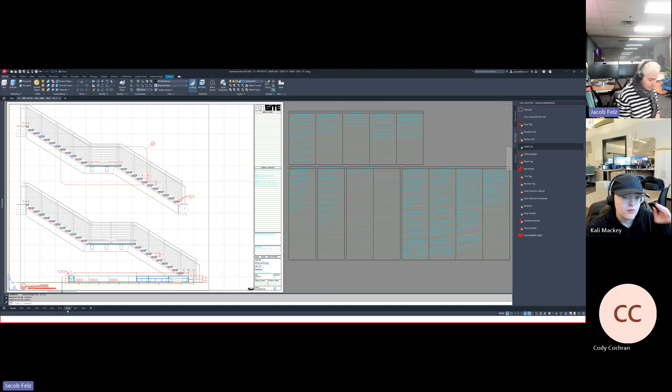All right. Well, Kali, have you had any time to really jump in there and work on any of that stuff at all yet, or are you just starting out? I'm about 2/3 to 3/4 through the first video. Nice. So I'm kind of going through the process where you were mitering through the tread and working on getting through that. Okay. Cool. That's awesome. Yeah, I'm fully done with the tread, press pulling that and then mirroring the end cap over to the other side. Okay. Well, cool. Very nice.

Very nice. I don't remember where we were on any of the videos because there's too many of them at this point. But yeah, that's pretty cool to hear. Glad you guys are getting through it a little bit at a time. I know I keep throwing stuff at you guys like markups or little side quest type things occasionally. So anything like that's probably going to take precedence over this anyway. But because we're kind of at a standstill, I'm going to keep working through this. I'll try to find something we can work on next if we do keep running low on work.

Is there anything you guys would like to learn about specifically, or do you want me to just pick something? Blocks would be great. I know that we've mentioned them several times in training, and it'd be really helpful to learn what goes into something like that. In the blocks? Yeah, we can do that. We can do that next if you guys would like. We'll go through the block editor, all the different menus and the different things that are in there.

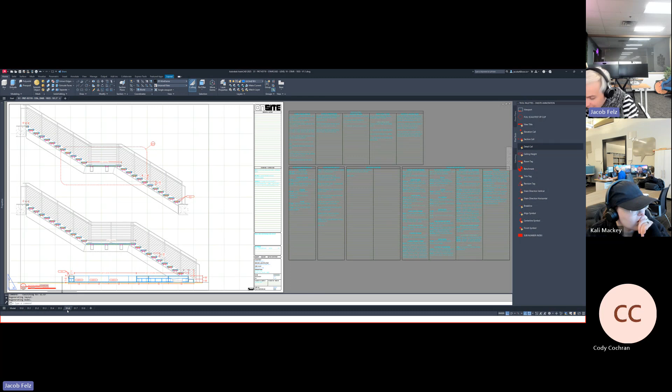I have AutoCAD books here that talk about it too. Cody, if you want to look through any of those, funny enough, the Cody up in Illinois also has pretty much the same AutoCAD books there. So you could borrow his if you ever want to see more about how the block editor works. But we can work through that next once you guys are pretty caught up with these stairs. And I'll show you guys how we can make some of the more complex blocks too. But I want to start with the block editor menus and getting familiar with that first. And then I'll show you how to do those lookup tables and all that fun stuff in there.

So that way, if you guys want to play around with that at some point down the road, you have a little bit more background on it. We did go over a little bit of blocks here, but barely anything. We barely scratched the surface because all we were doing was taking the lines that we already drew and just making it a block. So, yeah, I'll put together some notes so we can do blocks next for you guys. That'd be cool.